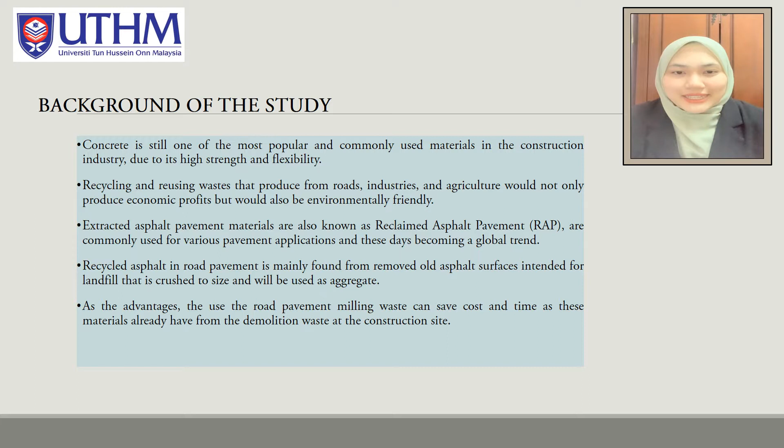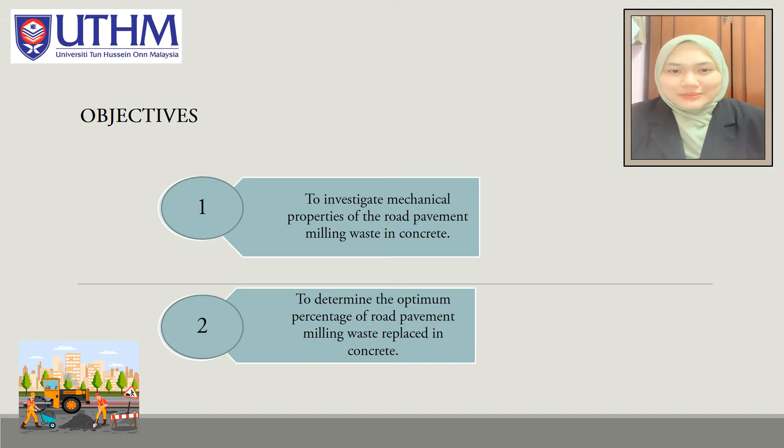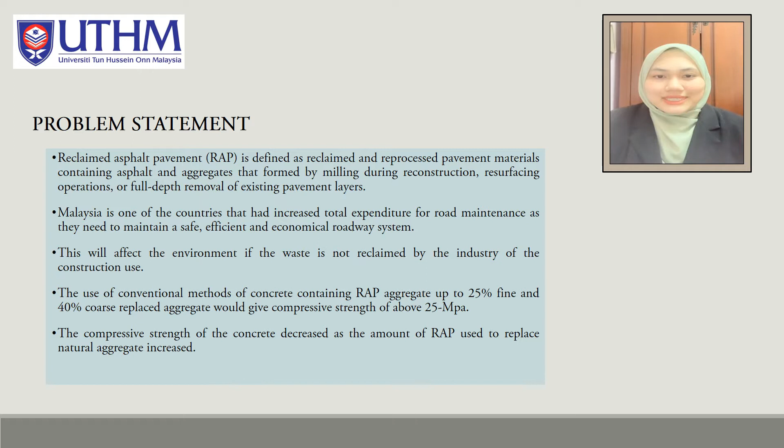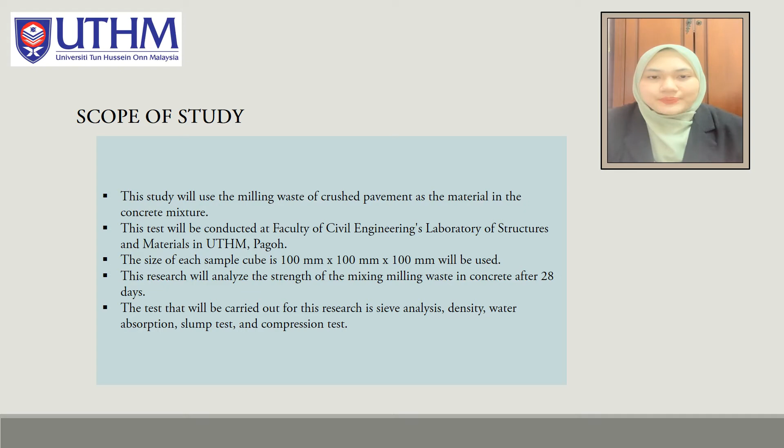This research will analyze the strength of the milling waste mix in concrete after 28 days. The tests that will be carried out for this research are sieve analysis, density, water absorption, slump test, and compression test.

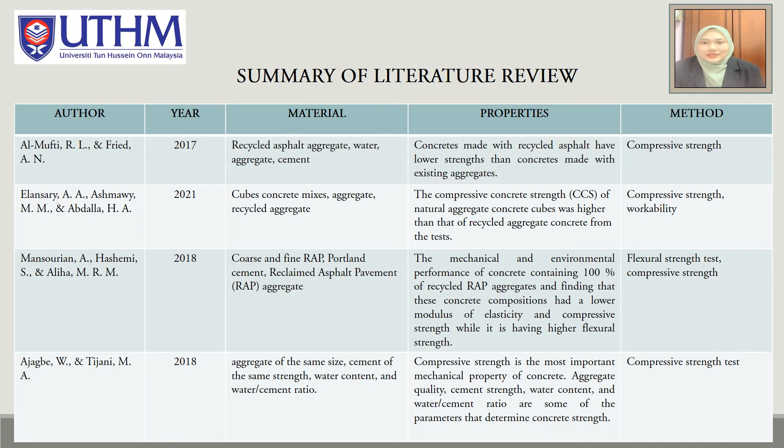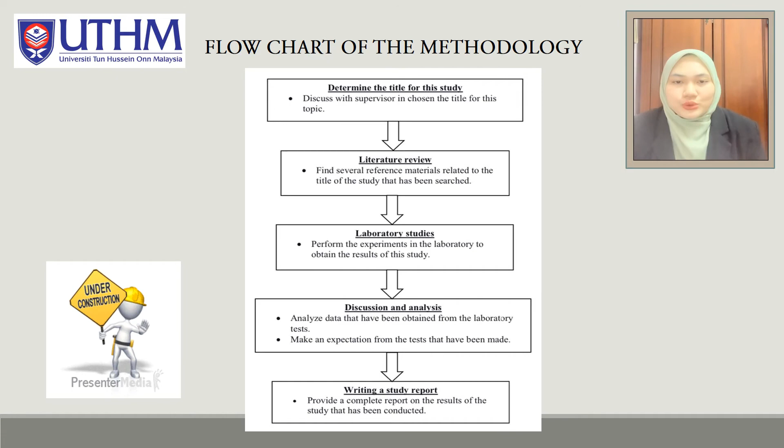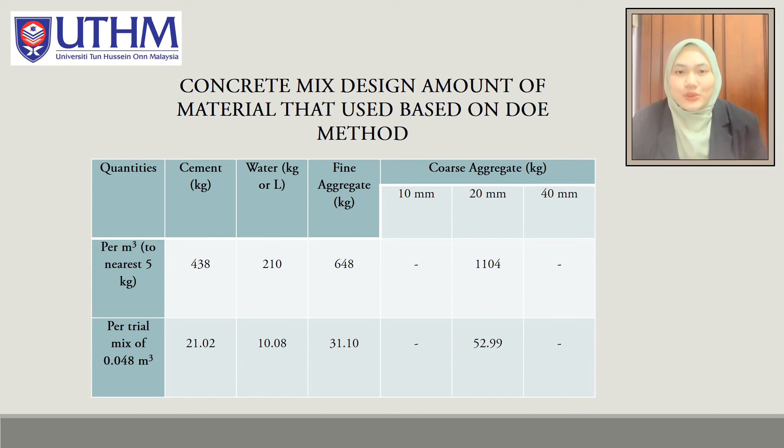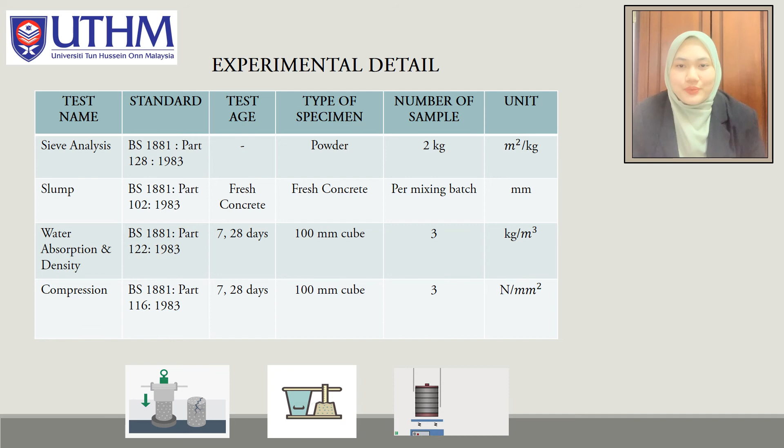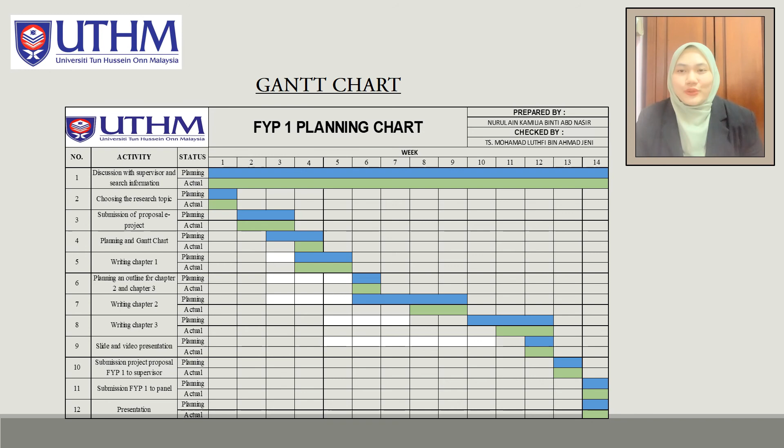Next, we go to the Gantt chart. For final year project 1, this figure shows the planning chart, which starts from week 1 until week 14. It has 12 activities that I have planned. The status shows the planning and actual. This Gantt chart will help me a lot in being punctual, as I need to follow the weeks to finish the activities that I have planned. This figure shows the Gantt chart, the planning chart for final year project 2. These are the activities I have planned to do next semester for final year project 2.

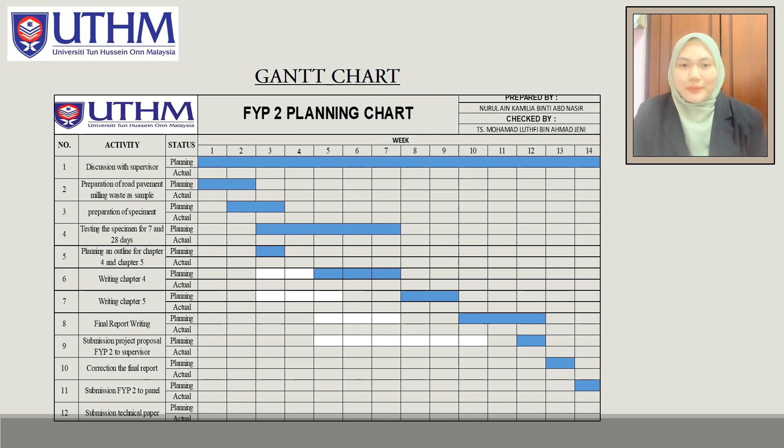For the expected result of this study, at the end of this study, concretes containing recycled asphalt pavement will produce lower workability than concretes made with normal aggregates. Then, the concrete that has road pavement milling waste has a lower compressive strength than normal concrete.

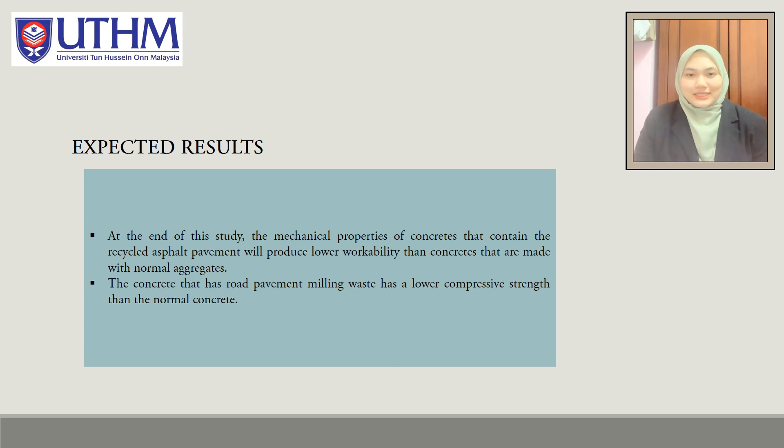For the conclusion of this project, in a nutshell, there are many benefits in reusing road pavement milling waste, as it can save our lands from pollution. Aside from that, using reclaimed asphalt pavement in concrete supports the zero waste movement and the green industrial agenda, as it can reduce the trash in landfills while also producing green concrete without the use of non-environmentally friendly Portland cement. As a result, this research can be the right option for reducing waste and lowering the environmental effect.